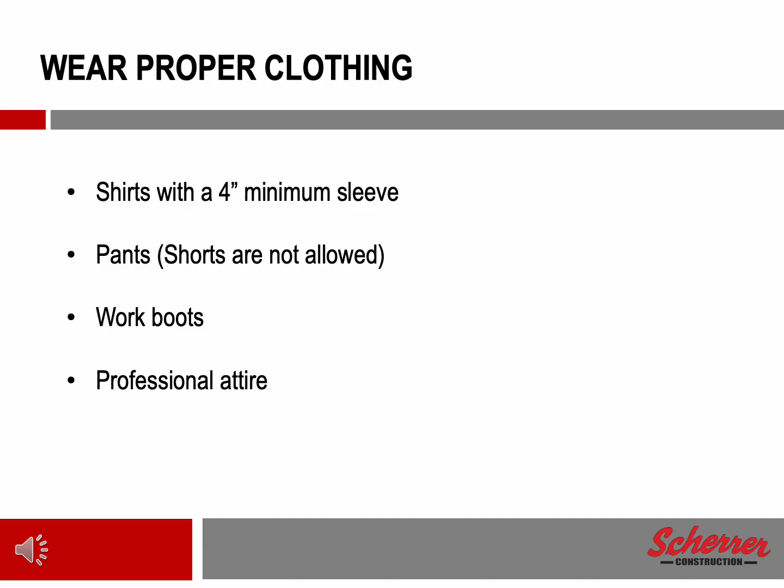Wearing the correct personal protective equipment, or PPE, is also important out on the job sites. PPE that is required includes hard hats, safety glasses, gloves, which shall be worn when handling material or performing construction activities, hearing protection, which shall be worn when exposed to noise levels above 90 decibels, and high visibility vests or shirts when working around moving equipment or vehicles. Additional PPE may be required depending on the task. Please contact the site superintendent for additional PPE requirements.

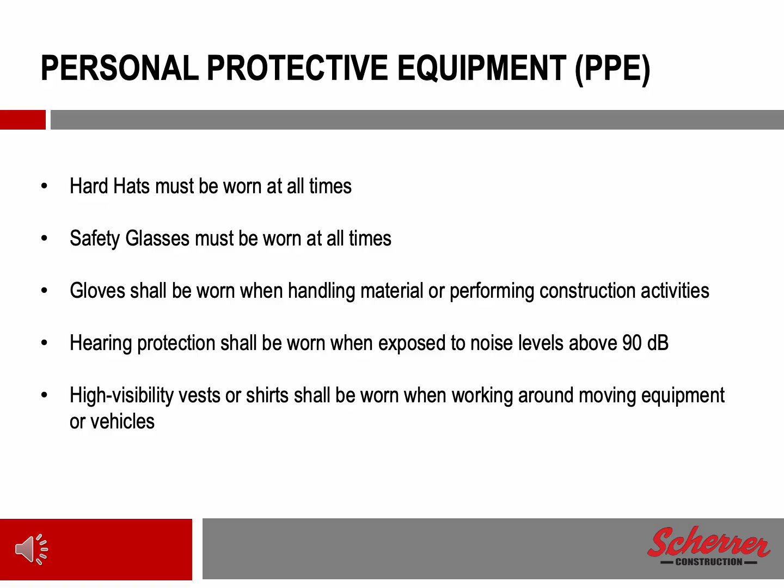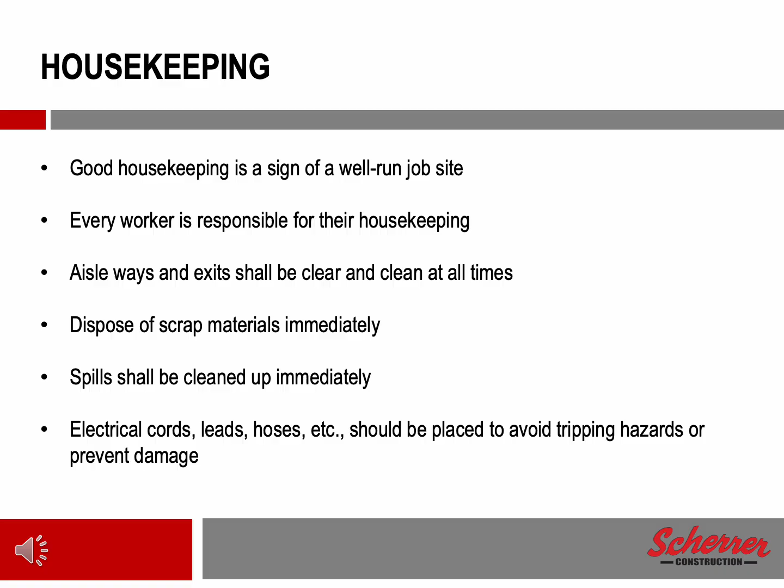Good housekeeping is a sign of a well-run job site. Every worker is responsible for their housekeeping. Aisleways and exits should be clear and clean at all times. You must dispose of scrap materials immediately, and spills should be cleaned up immediately. All electrical cords, leads, hoses, etc. should be placed to avoid tripping hazards or to prevent damage.

All employees have a right to know what chemicals they work with, what the hazards are, and how to handle them safely. All containers should be labeled with the appropriate contents, and unlabeled containers of any size containing any substance are prohibited. Employees can request information from the site superintendent on any substances in the workplace. It is important you understand that there are potential health and physical hazards associated with the chemicals in the workplace. Safety data sheets and your supervisor are great resources for understanding those hazards and how to protect yourself.

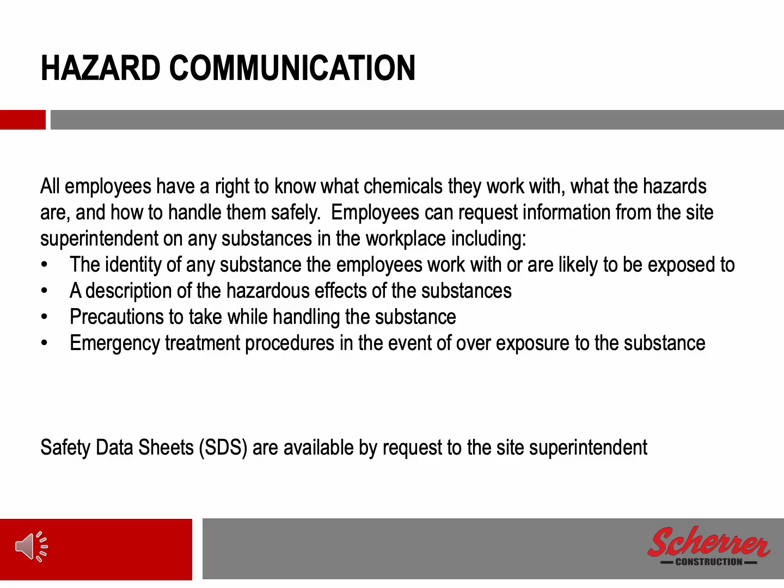Fire extinguishers can be valuable in preventing the spread of fires. If a fire does occur, notify employees in the area and evacuate the area. Only extinguish the fire if you are trained and capable of doing so. If you find a defective extinguisher, let your supervisor know immediately.

Hot work involves any task that creates sparks or flames, such as cutting of metal, grinding, and welding. The area must remain clean of combustibles and flammables and could include covering holes or wetting the area. A spotter should watch for wayward sparks and stay for 30 minutes after the work to look for signs of smoke or fire. Contact the site superintendent for specific requirements for hot work permits.

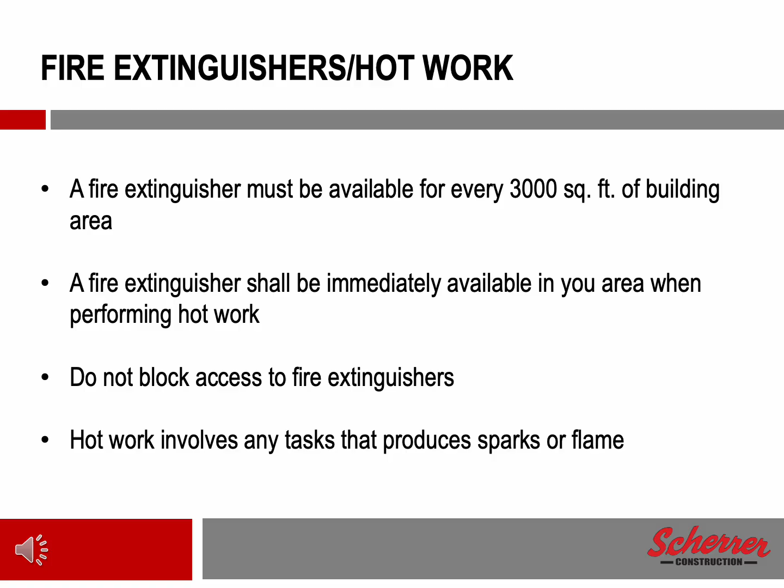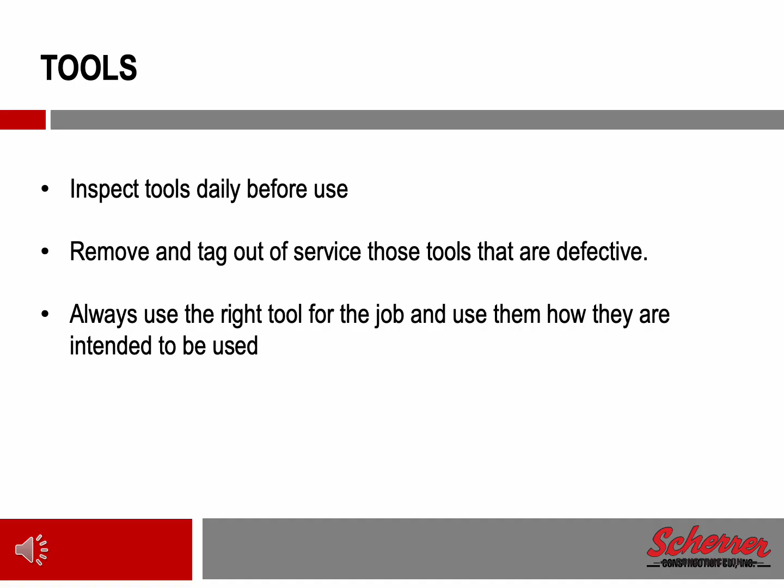While tools are an important part of the job, be sure to use them safely. Inspect tools daily before use. Remove and tag out of service tools that are defective. Always use the right tool for the job, and use them how they are intended to be used.

All extension cords and cord-connected tools must be plugged into GFCI outlets or GFCI pigtails. Inspect cords daily for missing grounding plugs, cut sheaths, or frayed wiring. Any damaged equipment should be removed and tagged as out of service. And keep all materials and equipment at least 10 feet away from overhead electrical lines.

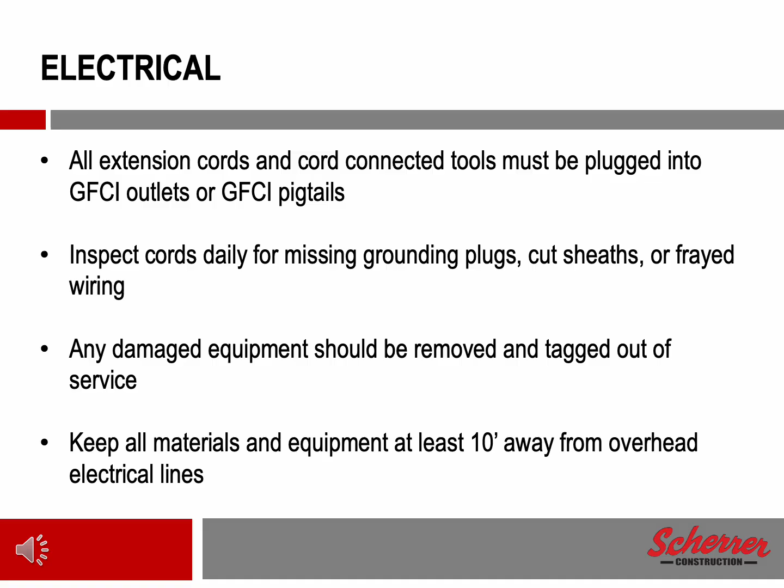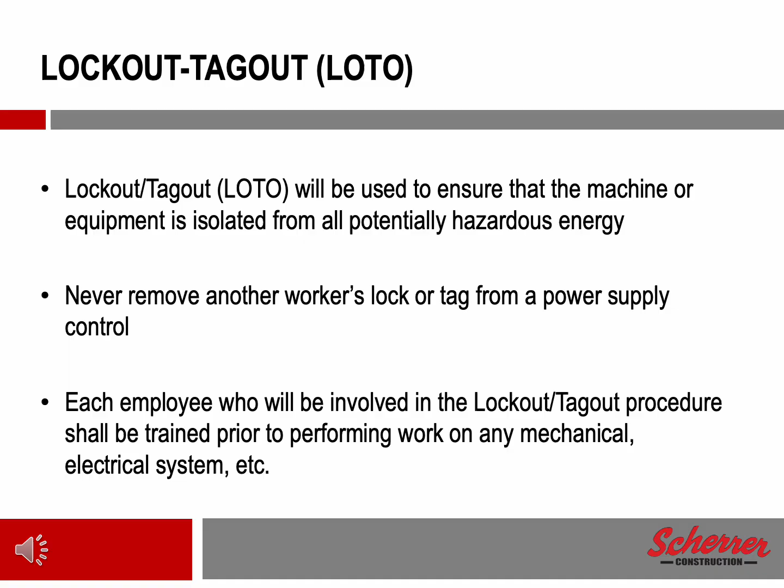Prior to working on any energized equipment, you need to follow the proper lockout, tagout procedures. Energized equipment can include, but is not limited to, pneumatic, hydraulic, electrical, mechanical, thermal, or chemical systems. Please contact the site superintendent for further instructions on LOTO procedures. Working on equipment that has not been properly locked out can lead to serious injury or death. Prior to working on any equipment, employees must be trained on lockout, tagout procedures.

Only employees who are trained and authorized should operate equipment. When operating heavy equipment, you must wear your seatbelt, and when working around equipment, pay attention to the backup alarms. Always make eye contact with the operator before walking near heavy equipment, and be sure to wear your high visibility vests when working around heavy equipment.

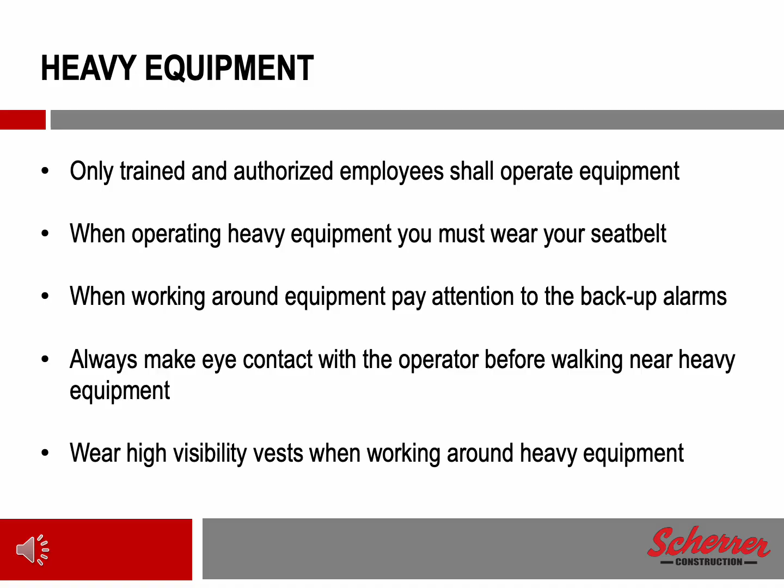Falls are the leading cause of fatalities in construction. 100% fall protection is required when working at heights of 6 feet or more. If the exposure to falls cannot be eliminated, guardrails should be our first choice, and personal fall arrest as the last choice. Working without fall protection will not be tolerated.

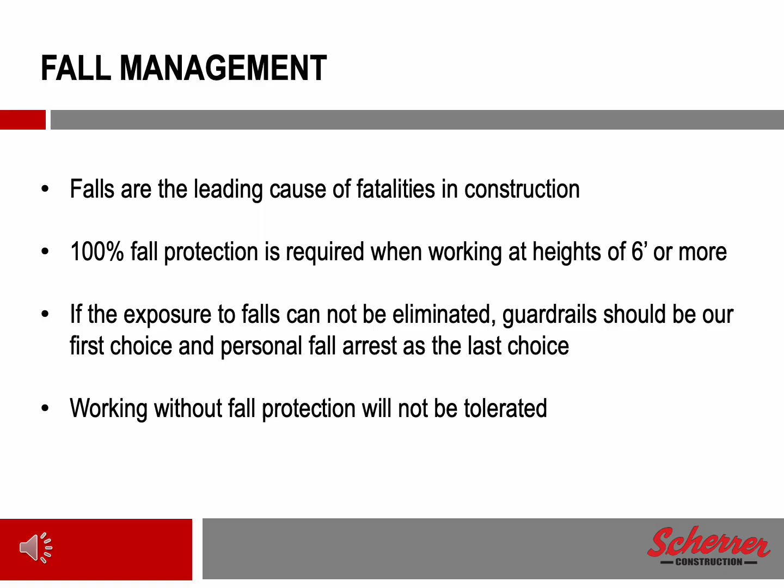Guardrails, when installed, must be a height of 42 inches plus or minus 3 inches and include a mid-rail. Guardrails must withstand 200 pounds of force and include a toe board if workers will be below. Warning lines should be used to keep people out of the area and not as fall protection. Warning lines, if used, must be installed a minimum of 15 feet from any leading edge, unless engaged in roofing activities on a low slope roof. If guardrails are removed, a personal fall arrest system should be used.

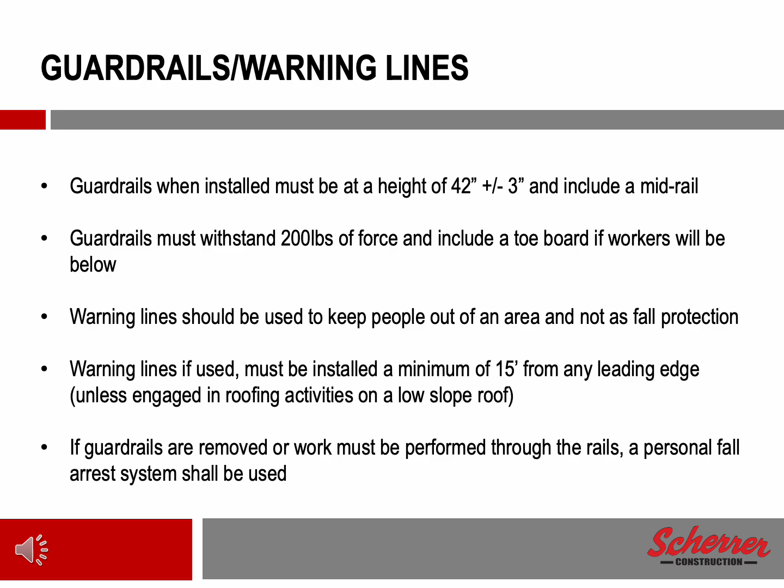All workers using a personal fall arrest system must first receive training on proper fall management. These systems must be worn with the intention that you will be falling. They are not intended as window dressing. Many fatalities have occurred with personal fall arrest systems because the worker did not select an adequate anchor point and it gave way. Personal fall arrests consist of properly fitted harnesses, lanyard, or retractable connectors, and an anchor point.

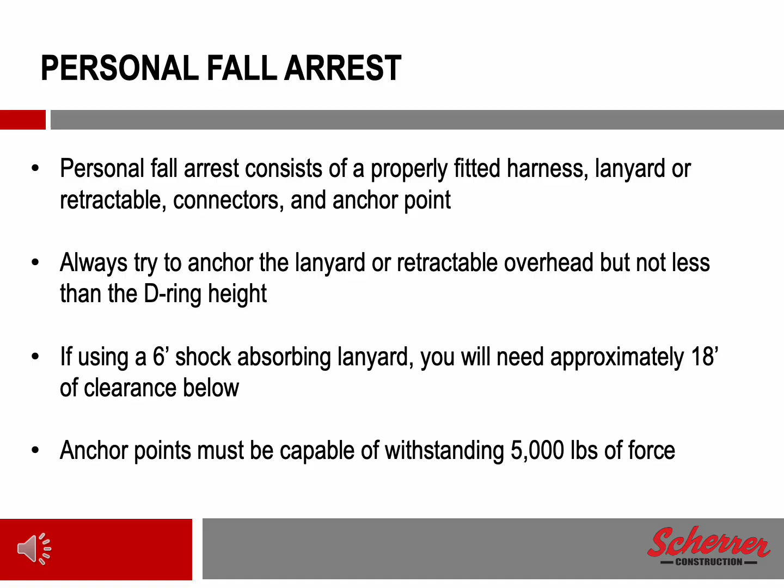Always try to anchor the lanyard or retractable overhead, but not less than D-ring height. If using a 6-foot shock-absorbing lanyard, you will need approximately 18 feet of clearance below. Anchor points must be capable of withstanding 5,000 pounds of force.

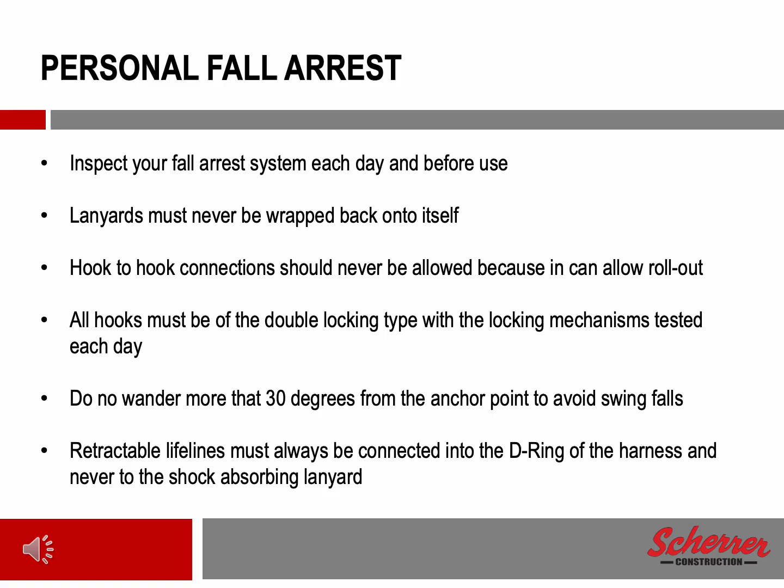When using a personal fall arrest system, inspect your fall arrest system each day and before use. Lanyards must never be wrapped back onto themselves. Hook-to-hook connections should never be allowed because it can allow rollout. All hooks must be the double locking type with the locking mechanism tested each day. Do not wander more than 30 degrees from the anchor point to avoid swing falls. And retractable lifelines must always be connected to the D-rings of the harness and never to the shock-absorbing lanyard.

Floor holes that we create or created by other contractors must be protected. The exposure is from us stepping or falling through the hole or from dropping tools and materials to workers below. If covers are removed, fall protection may be required. All holes or depressions greater than 2 inches in their least dimension must be protected by a floor hole cover or guardrails. When using floor hole covers, they must be capable of supporting 2 times their intended load. All floor hole covers must be blocked or secured against movement, and all floor hole covers must be marked with the word hole or cover.

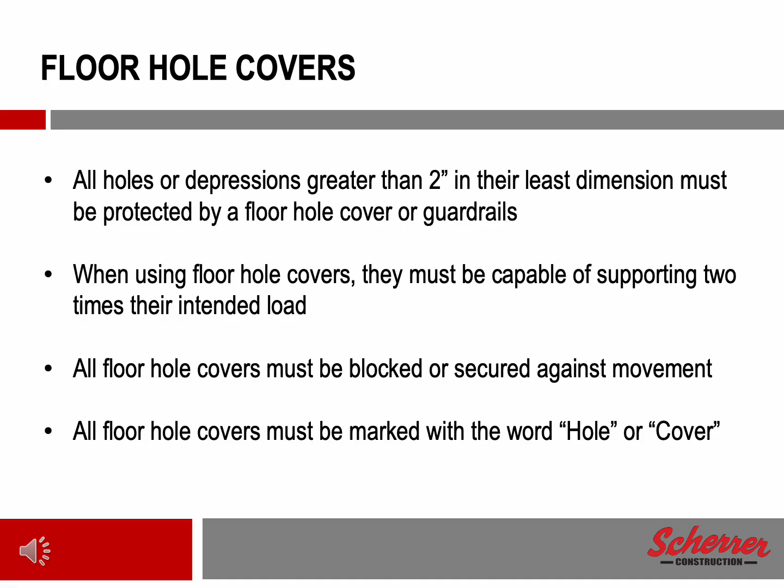All workers using scaffolding must first go through training. All scaffolding must be inspected each day prior to use by a competent person. All working surfaces of scaffolding must be fully planked. All scaffolding and personnel must be kept a minimum of 10 feet from overhead power lines. All planks must be of scaffold grade.

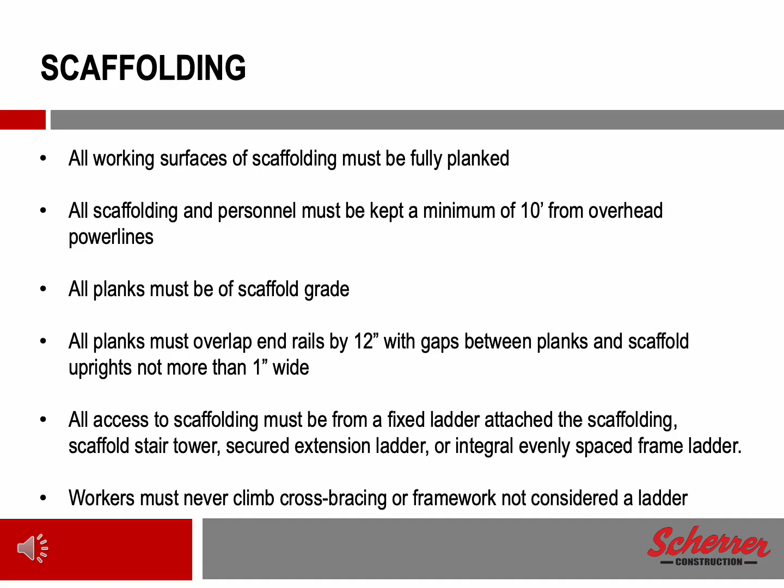All planks must overlap end rails by 12 inches with gaps between planks and scaffold uprights not more than 1 inch wide. All access to scaffolding must be from a fixed ladder attached to the scaffolding, scaffold stair tower, secured extension ladder, or an integral evenly spaced frame ladder. And workers must never climb cross bracing or framework not considered a ladder.

Numerous fatalities occur each year on construction sites from improper ladder use. Ladders may need to be held in place by coworkers if they are not yet or cannot be secured. All ladders should be inspected before use. Extension ladders should be set up at a 4:1 height to base ratio.

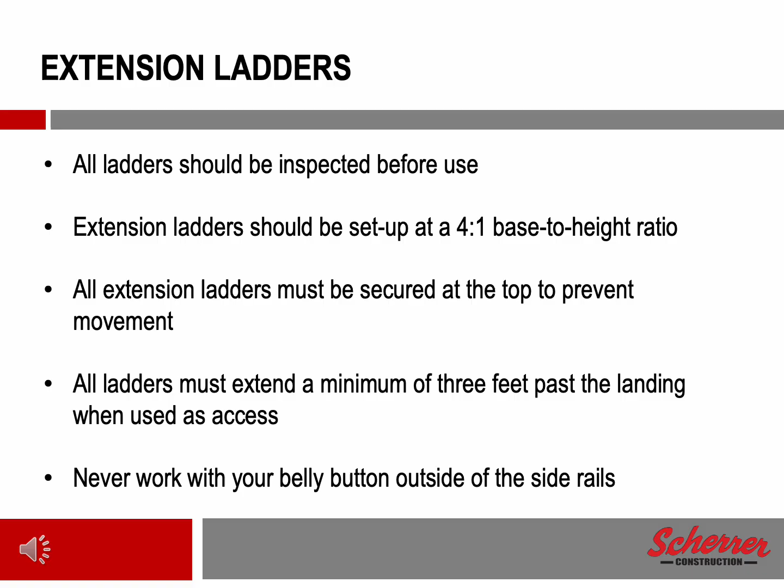All extension ladders must be secured at the top to prevent movement. All ladders must extend a minimum of 3 feet past the landing when used as access. And never work with your belly button outside of the side rails.

Step ladders are one of the most misused pieces of equipment on a construction site. Always use the right ladder for the job. All step ladders must be set up in fully opened and locked position. Step ladders should never be leaned up against a wall and climbed on. And the top of the ladder and top step should never be stood on.

Aerial lifts are a safe means to work at elevated heights when used properly. Always review and assess the areas the lifts will be driven on before operating the lift. During this assessment, you'll be looking for holes, indentations, or poor soil conditions. Tip-over lifts from these sources are a leading cause of lift-related fatalities.

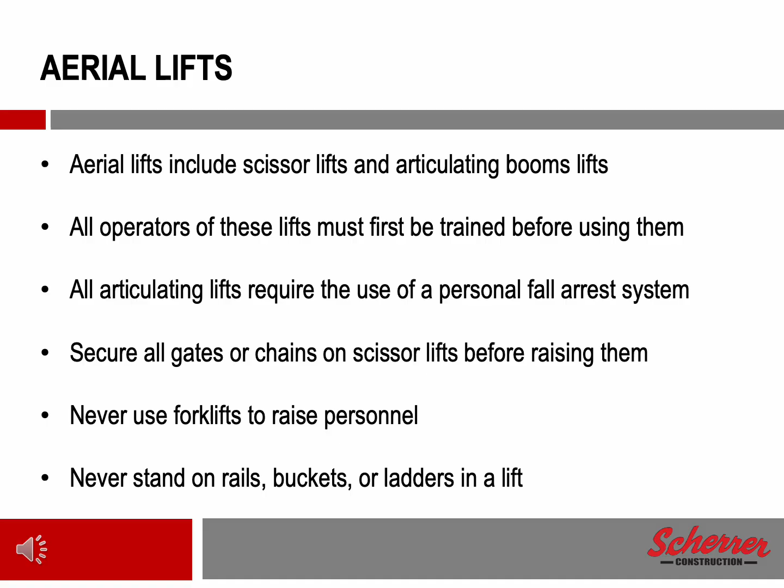Aerial lifts include scissor lifts and articulating boom lifts. All operators of these lifts must first be trained before using them. All articulating lifts require the use of a personal fall arrest system. Secure all gates or chains on scissor lifts before raising them. Never use forklifts to raise personnel. And never stand on rails, buckets, or ladders in a lift.

All excavations must be inspected each morning by a competent person before entering them and during the day if conditions change. All excavations must be supervised by a competent person. All utilities must be properly located and supported prior to and during excavations.

All spoil piles must be set back at least 2 feet from the excavation edge. All excavations 4 feet or deeper require a ladder every 25 feet of travel for safe egress. And all excavations 5 feet or deeper, or less if warranted, require some sort of protective system.

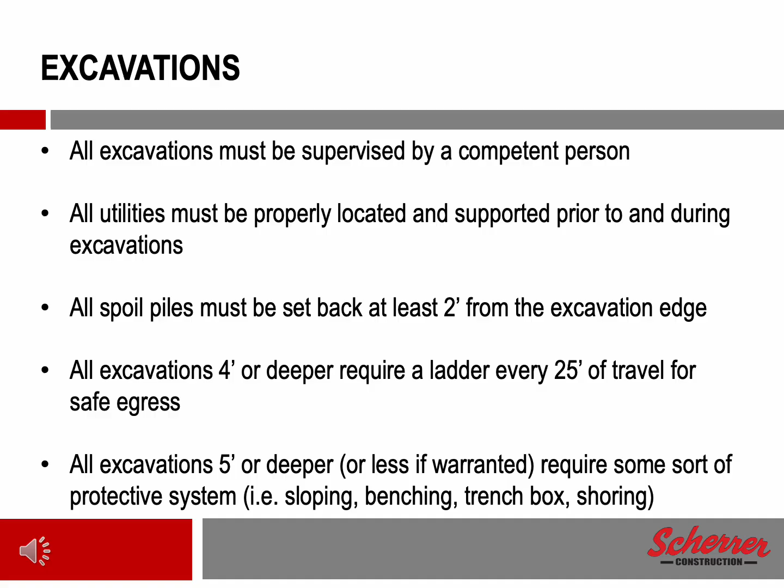Your supervisor shall evaluate the workplace to determine if any spaces are permit-required confined spaces. All permit-required confined spaces are to be labeled with danger signs. No employee may enter a permit-required confined space without authorization by Scherrer Construction Company Incorporated and a company-approved permit to work in that area.

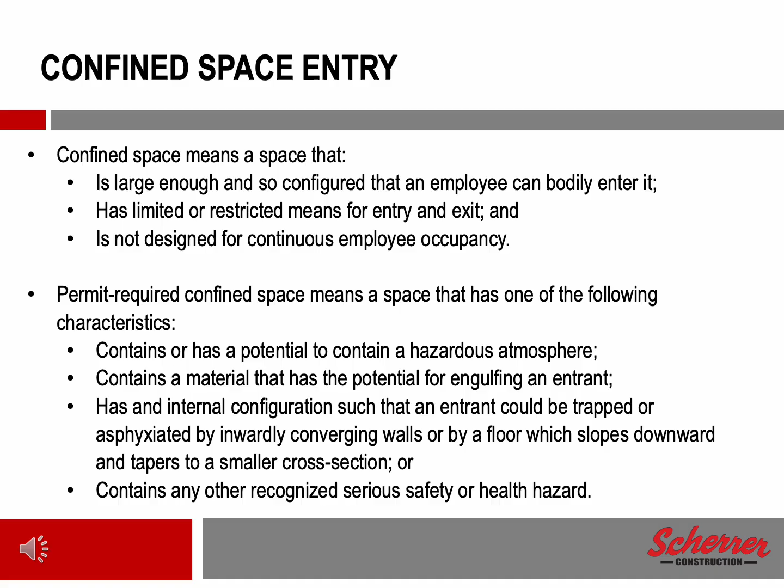All employees working in confined spaces shall be trained in the hazards involved, proper usage of equipment, and company permit requirements. Contact your supervisor for more information or to get training.

Substance abuse can lead to serious injuries to you and your coworkers and will not be tolerated on Scherrer Construction jobs. We are committed to a drug-free workplace. Using drugs or alcohol goes against our commitment to safety, and if you need help or suspect anyone is under the influence of drugs or alcohol, contact your supervisor immediately.

The Scherrer Construction Company Incorporated superintendent will provide the following information to you before starting work at this job site. After completing this orientation, and having gone over specific site items with the superintendent, you will be required to complete the orientation receipt stating that you understand and will follow the rules of this job site.

As a recap, be sure to always report accidents or injuries to your supervisor immediately, no matter how small they may be. Report all COVID-19 symptoms or close contacts to your supervisor. We are committed to having you know the hazards of your work. The safety depends on you and everyone around you, and we will not tolerate violations of safety rules.

Finally, stop work immediately if you see an unsafe condition or behavior. Welcome to Scherrer Construction. We thank you for your commitment to making this a safe and successful job.